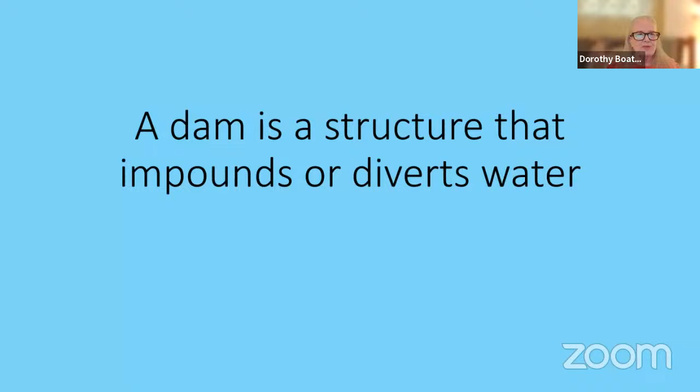First of all, we need to decide what is a dam, and the simplest definition I could find is that it is a structure that impounds or diverts water. So that includes a lot of different kinds of structures. I will be giving examples in the last third or so of my talk about removing 4 smaller dams on the Baraboo River, which is unique in that it has the longest undammed stretch in the United States at 120 miles. And then I will be giving some information about the removal of dams on the Klamath River, which are hydro dams, beginning this summer and ending next year, and will be the world's largest dam removal project.

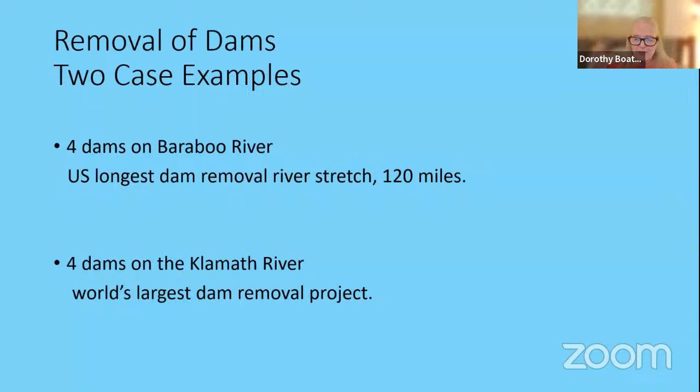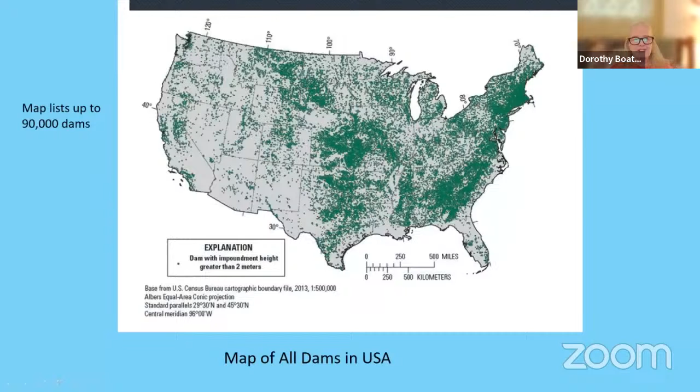So this is kind of astonishing. How many dams are there? Are there just a few? Apparently not — there are a lot of dams, as the next illustration will show. When you look at this map, you probably think all of the green is some sort of topographical feature. It is not. Each one is a little tiny green spot, as shown in the legend here. And there is an official list of up to 90,000 dams, so that's an awful lot of structures.

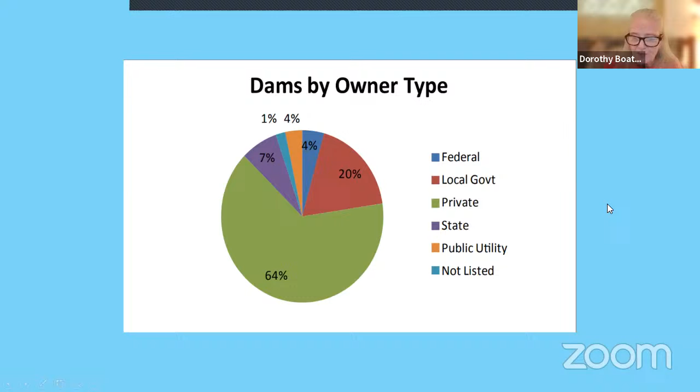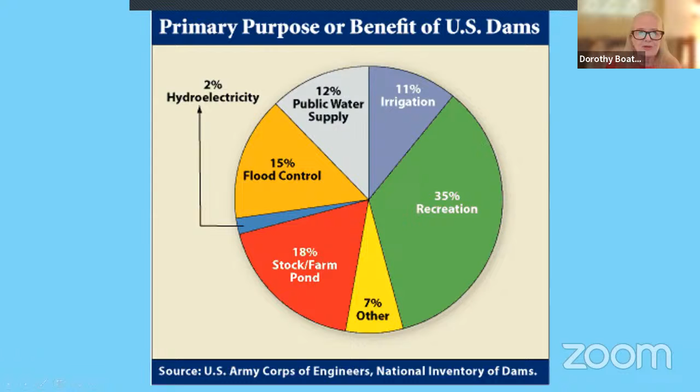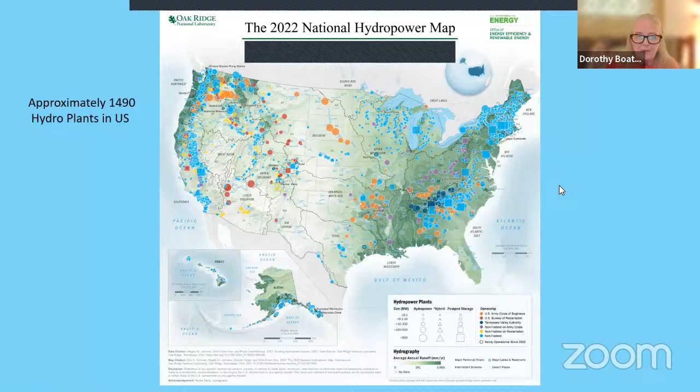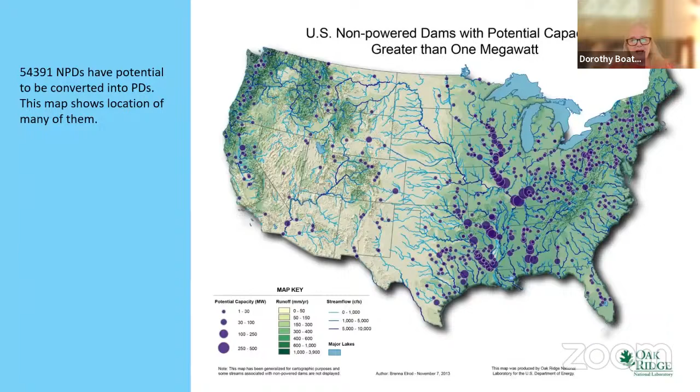A growing interest is in using or reusing non-powered dams and retrofitting them into potential power dams. This shows likely dams and their locations throughout the United States. So many dams could have the potential to become hydro dams if needed.

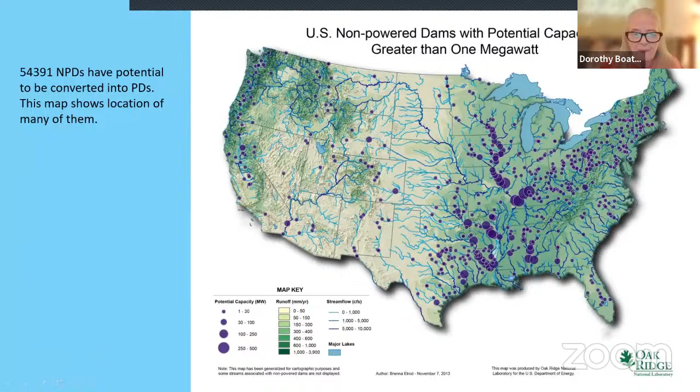Of the existing hydropower, who owns it? There are essentially 3 sectors: federal agencies, public ownership, and private ownership. The private ownership includes investor-owned utilities, independent power producers, and industrial companies, whereas the federal agencies are U.S. Army Corps of Engineers, very importantly, the Bureau of Reclamation, and the Tennessee Valley Authority, which is more prevalent on the East Coast. Whereas U.S. Army Corps of Engineers and Bureau of Reclamation factor very largely in the West.

Now, there is a dichotomy between the ownership of hydropower and the capacity or the output. Well, we find that the majority of the plants, as shown, if I can get my mouse to work, over here, the majority are in private ownership, whereas they have limited capacity. Federal agencies have only a smaller number of plants, but they are much higher energy producing, the majority of the energy.

And for our group, we need to think of hydropower as coming in 3 different varieties: impoundment structures, diversion structures, and pumped storage. These hydro plants throughout the United States range in size from small systems that are suitable for a single home or village to large projects that produce electricity for utilities. Again, on the numbers, of all of the 90,000 large dams, fewer than 2,300 produce power. So those are important pieces of information.

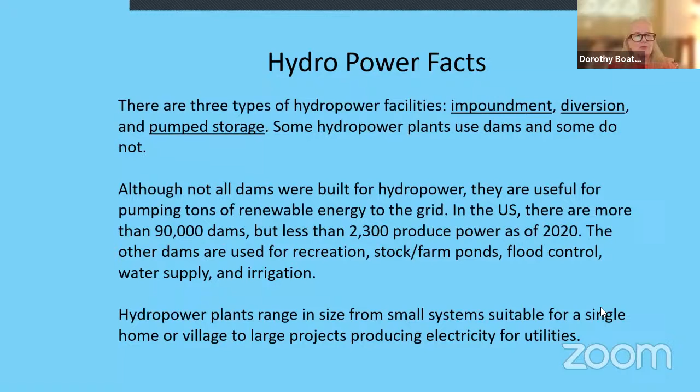Now, the impoundment hydro looks very much like what we expect a dam to look. We have the dam structure itself. We have a reservoir behind the dam. We have a spillway to release part of the water in a controlled fashion. In more modern dams, we have fish ladders to help promote the return of fish upstream. And then finally, we have the power generating component with the turbines and generators.

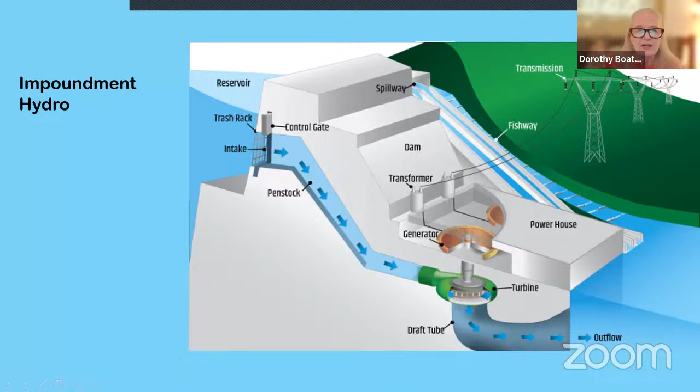An important part of hydro is diversion hydro, and I had no idea, but Niagara Falls electricity is this kind of hydro, in that a sluiceway or channel is devised to remove part of the water so that it can then move through another channel downstream through the penstock into the powerhouse where the turbine and generators are located, and then the remaining water spills back into the riverway. Some of these diversion hydros don't actually require what we would consider a dam.

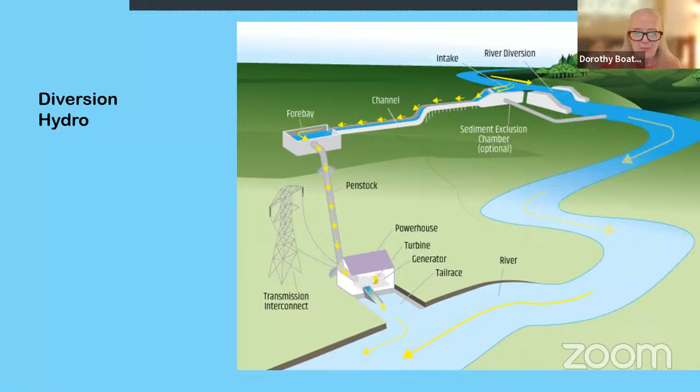And then a last type of hydro is not a dam structure at all, but involves pumped hydro, where we're using the potential energy of water to create the energy. So during the daylight, when the sun is shining here on solar panels, that energy is being used to pump water upstream or uphill into a reservoir. So that's what the power is doing. But at night, when the sun doesn't shine on the solar panels, the water that has been raised uphill is now released, goes down a channel to the turbines and generators, and generates electricity during the night.

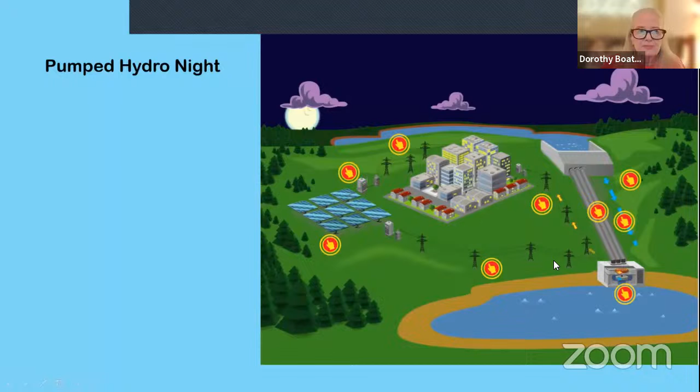Now back to dams, just in general, not necessarily dealing with hydro. There are basically 4 structural types of dams. The most common dam, of which 80% are, are called embankment dams. They're constructed from compacted soil, which is earthfill, or rock, which is rockfill, and have an impervious core. They're designed to transfer the entire water load downward. They are used to retain water across wide river valleys or for flood control, and typically they are shorter and wider than other types of dams.

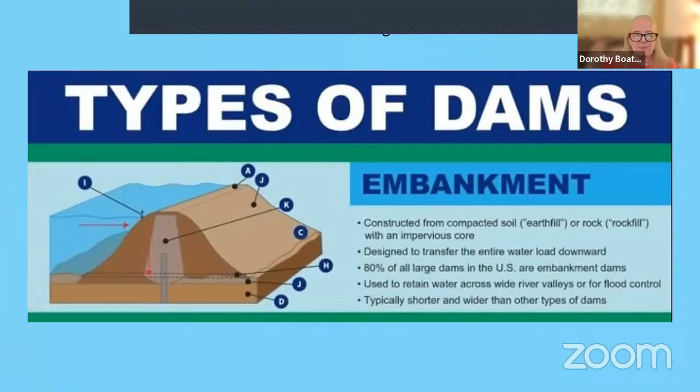Another type of dam that is particularly important in canyons is an arch dam. It's constructed of concrete, and it is designed to transfer the water load to adjacent rock formations. It is constructed only in canyons that have a solid rock wall that is able to resist the pressures of the dam. Because the canyon walls bear the majority of the load, the arch dams are thinly constructed and require less material than other types of dams.

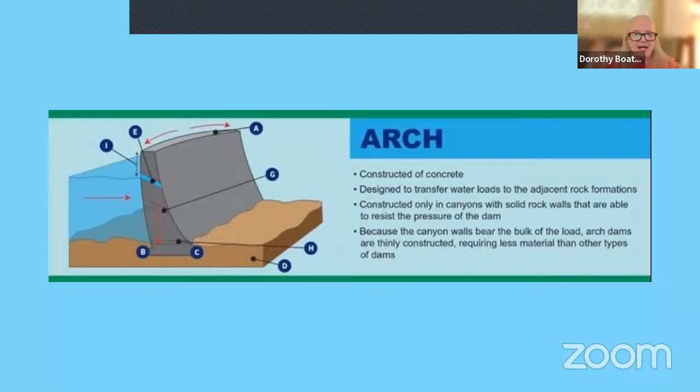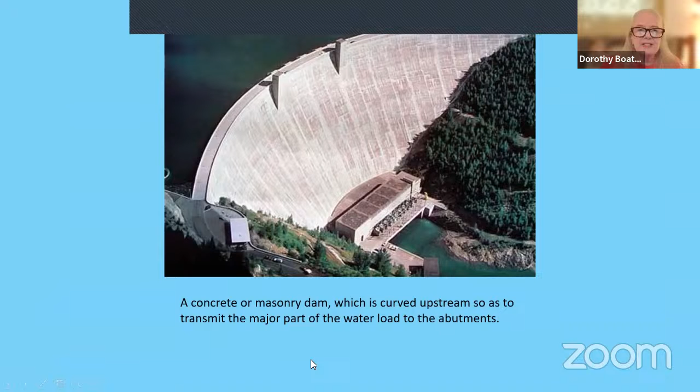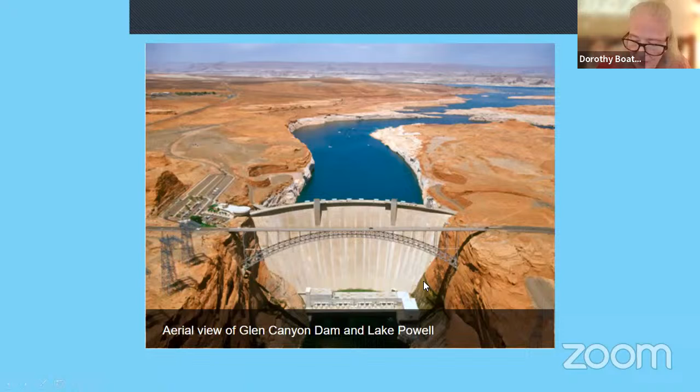Another type of dam, which is not as common, is a buttress dam, which is constructed of reinforced concrete. It bears the water load downward and to the buttresses. They have a hollow gravity dam with a solid upstream face and a buttressed downstream face. The buttresses are supports that transmit the water force to a bedrock foundation.

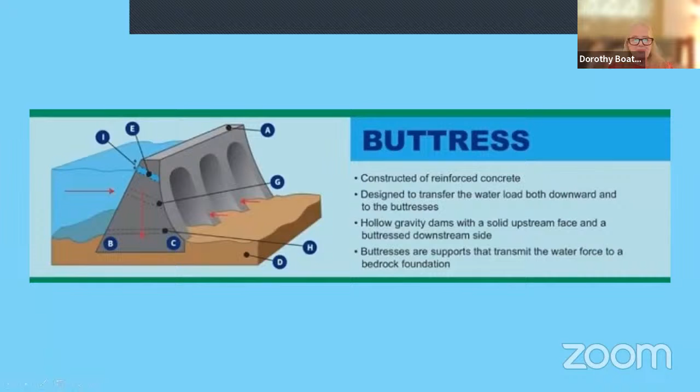And here is a dam in Canada, which very clearly shows this buttressing. And we can see the downstream side is maintained by a series of buttresses. These dams have various types and names, which include flat slab, massive head buttress, Ambursen dam, and multiple arch dam.

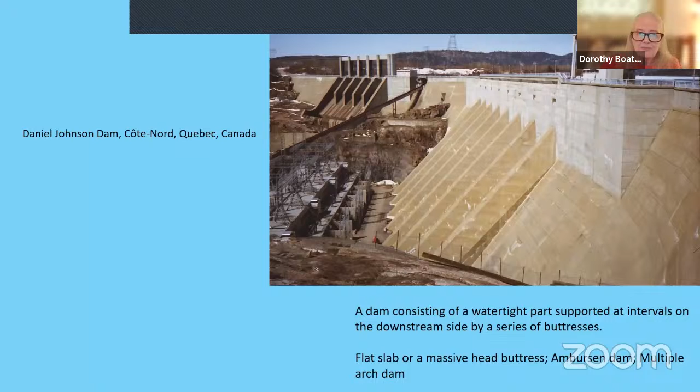And then our last category of dam is a gravity dam. It is constructed of concrete or stone masonry. It transfers the water load downward. It is typically found across narrow river valleys that have bedrock abutments and foundations. It retains water by utilizing the weight of the dam to resist the horizontal water load pushing against it. Each section of the dam is independently stable.

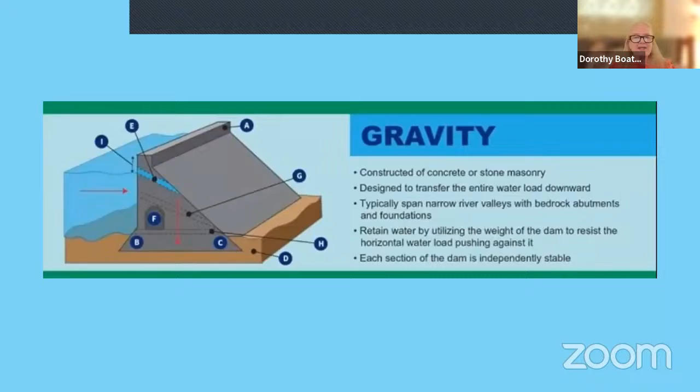And this is a pictorial representation of a well-known gravity dam, just to show what they might look like. Other names for this type of dam include hollow gravity dam, crib dam, roller compacted concrete dam. So those are our structural types.

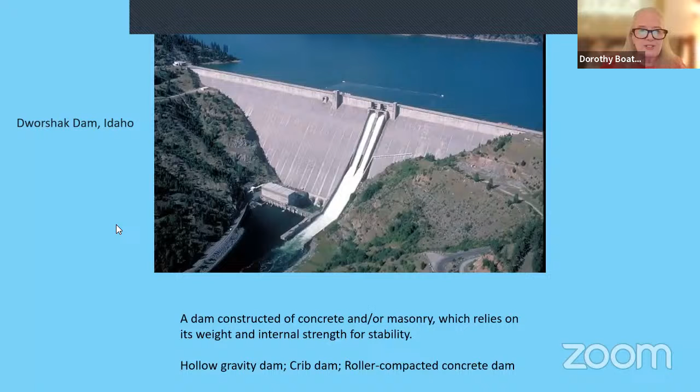And in terms of the frequency with which they're found, we again find that the earth or embankment type shown in the bottom bar are definitely the most predominant type, with the arch dams and the buttress dams being much less frequent.

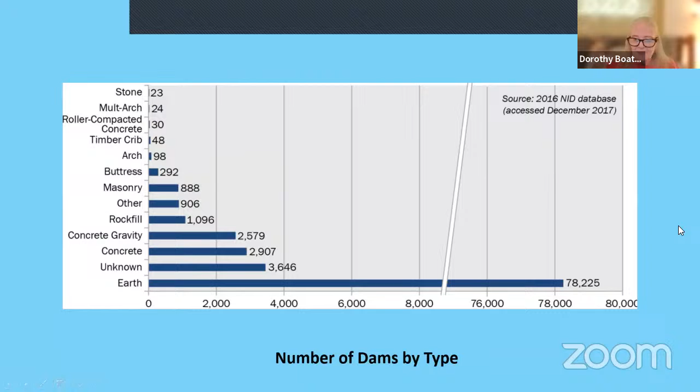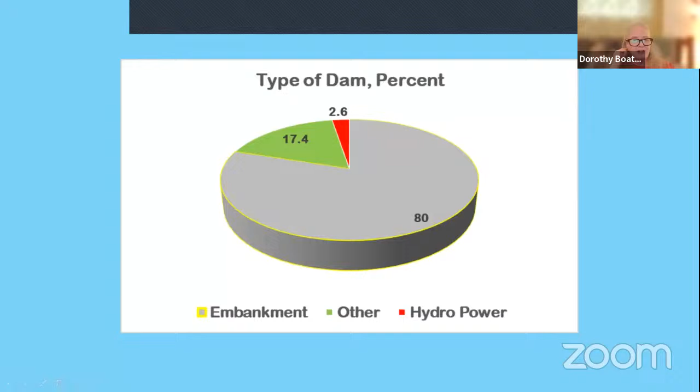And again, because we're interested in hydropower, this is just to illustrate the distribution of dams. Whereas 80% of the dams are embankment, only about 3% of dams are hydro dams. And I'm afraid that I've created a slightly misleading figure because some of the hydro dams in the 2 to 3% are actually embankment dams. But here you get at least a picture of what's going on.

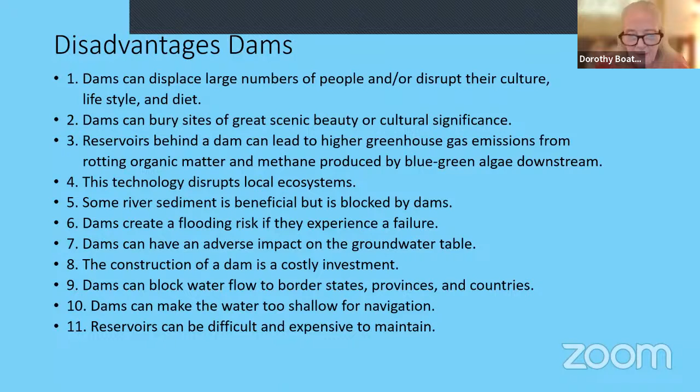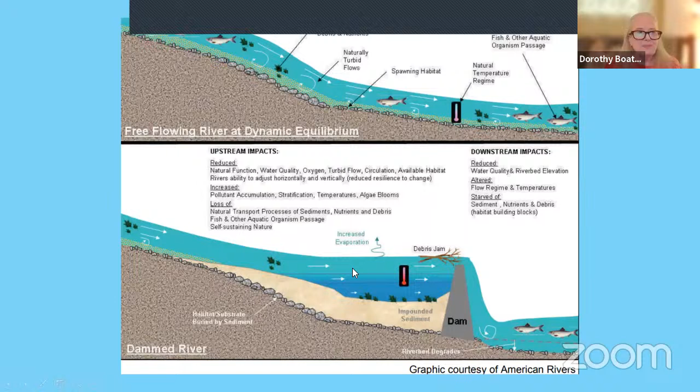We lose the natural transport processes of sediments, nutrients, and debris. Fish and other aquatic organism passage is also lost, as is the self-sustaining nature of the ecosystem. There are 4 ways that dams damage rivers. They block rivers, they slow rivers, they alter the habitat, and they impact the water quality.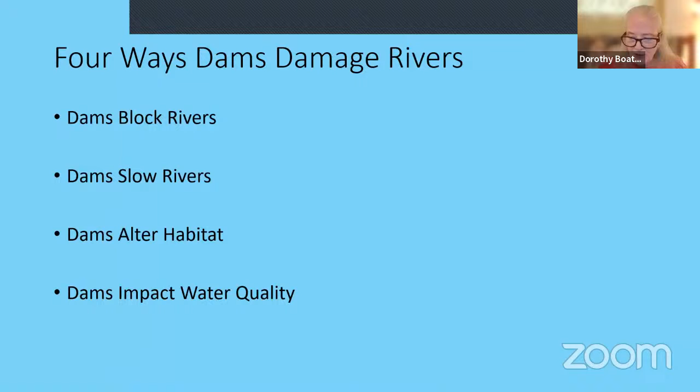The dams prevent fish migration. This also limits their access to spawning habitat, their food resources, and to safety niches that prevent predation. The dams are often a particular difficulty because they have been sited in the rapids parts of rivers, which are the most important for fish resources.

And we think that putting in fish passage structures will solve this problem, but it really only allows some fish to pass around the dam. And depending on the rivers and the number of dams the fish have to cross, that can affect their effectiveness. So they're not a panacea.

The rivers are slowed by the dams as well. Most aquatic organisms, including the important salmon and river herring, depend on the steady flow to guide them. The stagnant reservoir pools disorient the migrating fish and can significantly increase the duration of their migration.

Very importantly, dams also alter the timing of flows. Some hydropower dams withhold and then release water to generate power for peak demand periods. So these can be quite abrupt cycles, even though the average flow may be maintained. The huge spikes of withholding and then rapidly releasing have tremendous effects on the ecosystem.

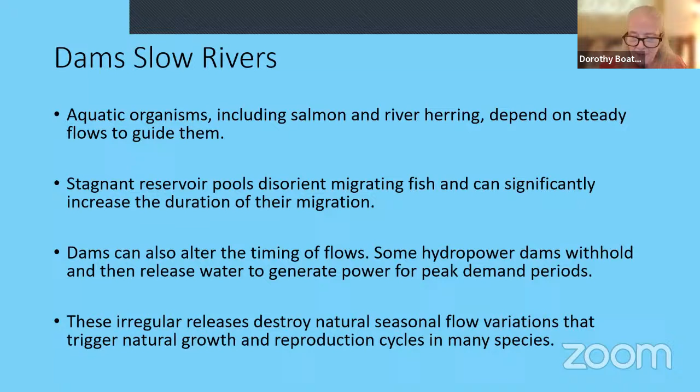The dams alter the habitat as well. They can trap sediment and bury the rock beds where the fish spawn. Important components of the habitat, which are logs, gravel, and food, can become trapped behind the dam, and then they are not able to maintain complex habitats such as riffles and pools downstream.

Additionally, dams that divert the water for power and other uses often remove water needed for healthy in-stream ecosystems. These peaking power operations can cause dramatic changes in reservoir water levels. This can result in stretches below dams that are completely dewatered.

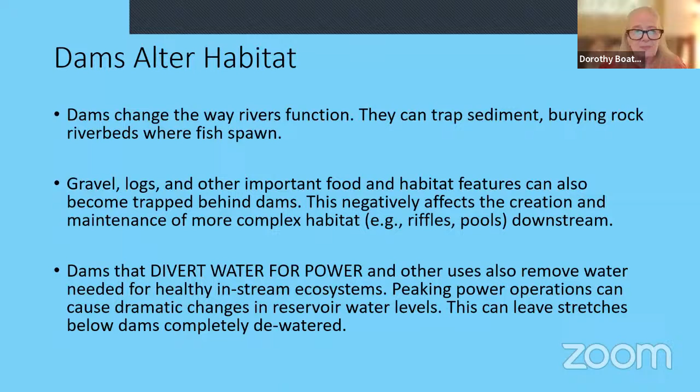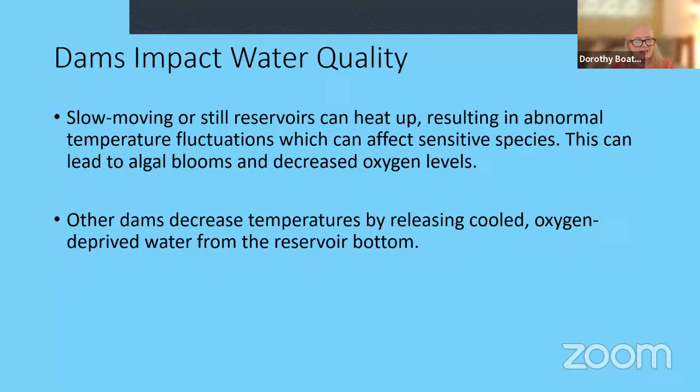The dams impact the water quality. There are two things that can happen. Usually, the slow-moving or still reservoirs heat up, which results in abnormal temperature fluctuations that affect species. This can lead to algal blooms and decreased oxygen levels. Other dams decrease the temperature because they release cooled, oxygen-deprived water from the reservoir bottoms.

So this comes from a handbook from the various river alliances about how to go about removing a dam. And they said, think small. Although there are up to 90,000 dams, as we have seen on some of the pictorials, that are large enough to be listed in databases, there are additional dams that are not shown.

Estimates are that there are 2 million small dams that are lower than 25 feet in height. A lot of these are in the Midwest and East Coast, and the majority of US dams, especially in the Midwest and East Coast, are small.

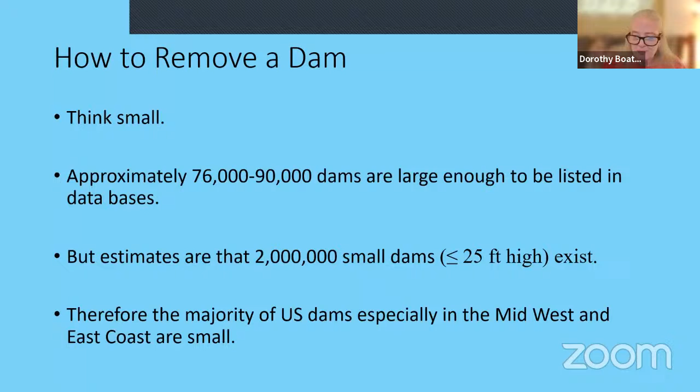There are various reasons to remove these small dams. Number one, they're old. Most dams are over 100 years, but the life expectancy for an average dam is 50 years. So many of these dams

are up for decisions about whether to repair them or to remove them. Most are not used for their original purpose, so the economic factors which would have made it easy to repair them and cover the costs are no longer there. Also, by being smaller, it is easier to estimate what things will cost and what the economic and environmental benefits will be of removal versus repair. And very importantly, a fourth reason is that by being smaller in scale, fewer people are involved to deal with,

fewer stakeholders to get on board, to convince and give approval. This is often the step that takes the longest time in any dam removal. Once the owner is convinced, convincing the communities and stakeholders that dams need to be removed is often a difficult process.

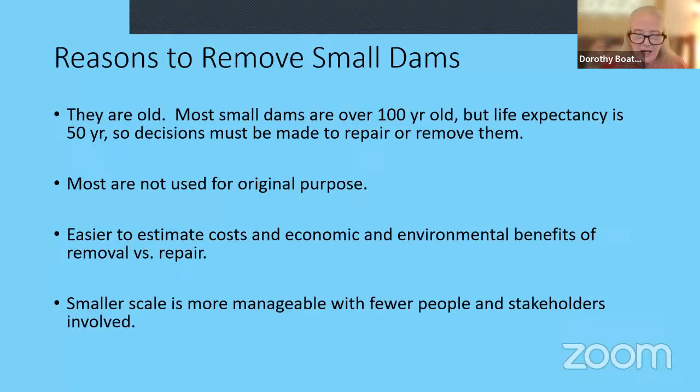These organizations also say there are 4 major categories of concern in dam removal. First is environmental. Ask questions: how would the river benefit from the dam removal? Would the plants, animals, and fish benefit from removal? And very importantly, would unwanted species be able to move up or down the river after dam removal? Think about zebra mussels in this category.

Again, would water quality benefit from dam removal? We think that would automatically be yes, but apparently that could change. Very importantly for the stakeholders is economic. Would dam removal reduce the local revenues from recreation or other uses?

Just think about what happened when Lake Delton very rapidly had its dam breached and was lost. It threatened a $3 billion industry based around the dam, and it was very quickly restored and rebuilt. But with other dams, we have to consider what would happen to lost revenues.

And then one has to decide what is the best economic decision, both short and long term. Who would benefit from the restored lands? Would the owners benefit at all? Would it just be the users? How would property values be affected? These are all very important things before a dam removal would be approved.

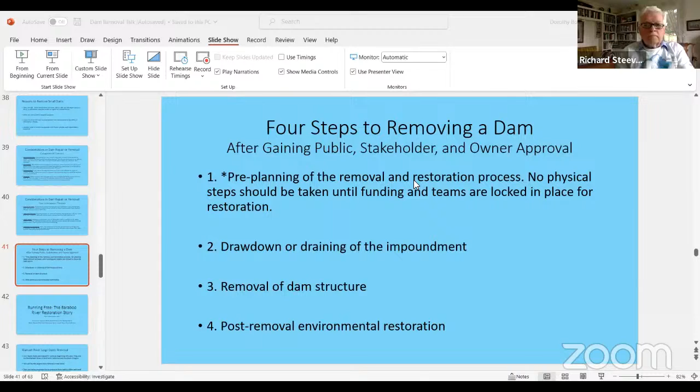The most important process they identified is the key aspect of pre-planning the removal and restoration process. They believe no steps should be taken for removal until the funding and teams are locked in place for restoration. Then, once you've decided to remove the dam, you have to remove the water, remove the structure, and then have remediation.

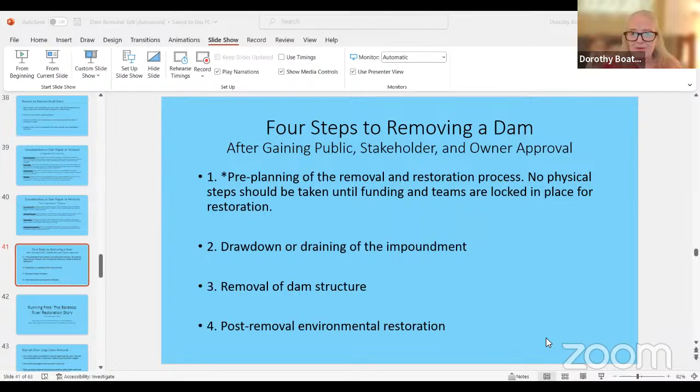The next thing I'm going to present is Running Free, the Baraboo River restoration story, which focuses on the removal of the 4 final dams in the Baraboo area. I believe this occurred around the year 2001, and included the Waterworks City Dam, the Oak Street Dam, the LaValle Dam, and the Linen Mill Dam.

At this point, I am going to shift to a different presentation, and I'm going to show you the film, which is about 15 minutes in length.

It is slowly loading, and I'm not quite sure why it's so slow.

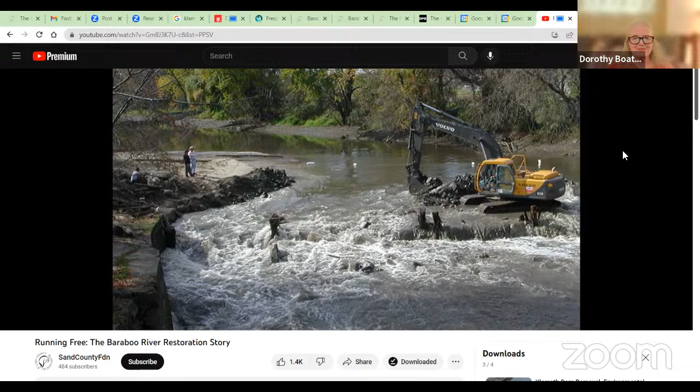The money to pay for the removal of the dams was a fraction overall of what it would have cost to keep them up. Where did the money come from? In part from the owner. Certainly the city of Baraboo put some of its money in.

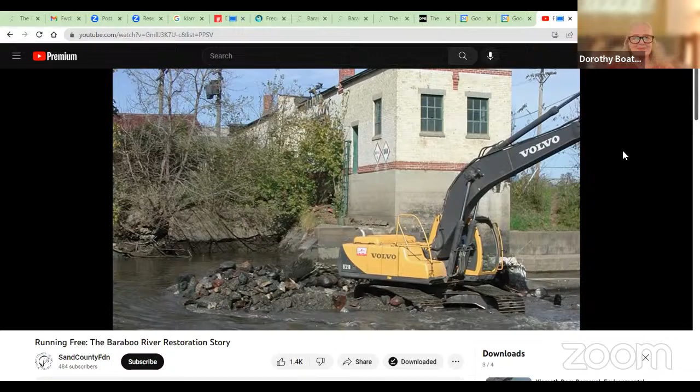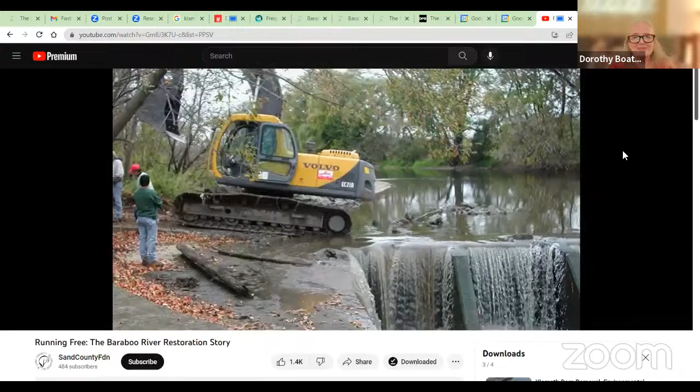The Wisconsin Department of Natural Resources and the U.S. Fish and Wildlife Service had matching funds available in some cases. The National Fish and Wildlife Foundation played an enormous role in funding the removal of these dams and the proper rehabilitation of the dam locations.

Water quality improvement often follows dam removal, not necessarily immediately, but generally within one to three months, which is pretty quick. When dams are removed, one of the most noticeable environmental improvements is the fish return, with the fish community diversifying to what it had been prior to the dams. Secondly, different parts of the habitat become available to support not just fish, but a wide range of other biota. The dams had basically displaced habitats because they're typically constructed where there's fast current for energy production.

And those tend to be some of the best habitats in a river system. There were 10 species of fish that lived only downstream of the Linen Mill Dam. Once the dams were removed, they quickly moved upstream, and so you've got a more diverse fishery and a more stable ecosystem, which results in a more sustainable fishery in general.

The types of habitat that was affected by the dam should have been colonized by a different type of fish, and now we're seeing those fish, such as very environmentally sensitive darters, which are in the perch family, a lot of minnow species, walleyes and bass, and hopefully we're going to see sturgeon migrate up through this river as well.

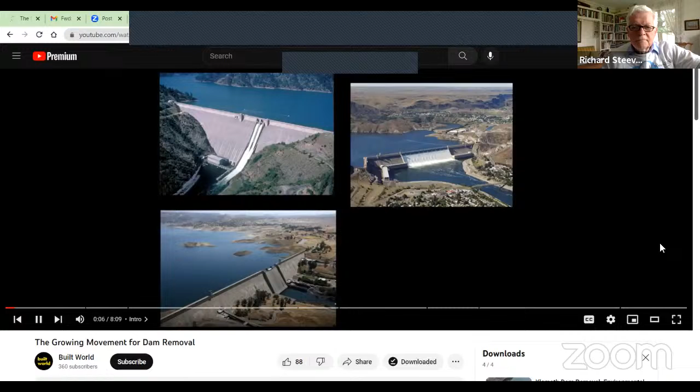Impressive structures ever built by humans are dams. Typically concrete or earthen structures, dams block entire river channels, controlling the flow of water in order to generate electricity, aid irrigation for farming, control flooding, and assist with ship navigation.

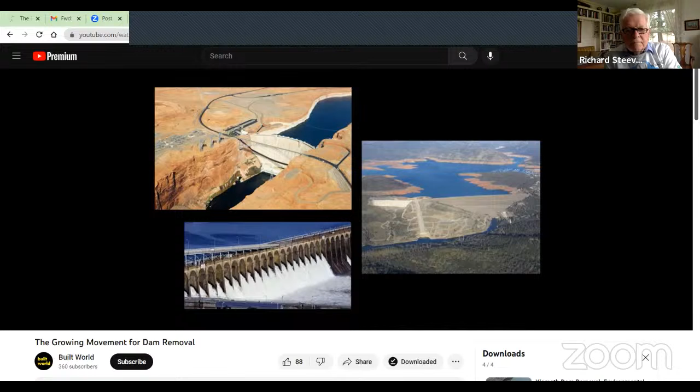In the United States, dams have dramatically altered the landscape, turning entire river systems into mechanized systems of controlled lakes. And in the process, the dams have turned deserts into productive farmland and provided clean, cheap electricity for a growing population. But in recent decades, concerns about the profound negative effects of dams have grown.

And a movement calling for their removal is getting ever louder. This is Built World, a channel about architecture, urban design, and infrastructure. And today, we're talking about dams and the increasing calls for their removal.

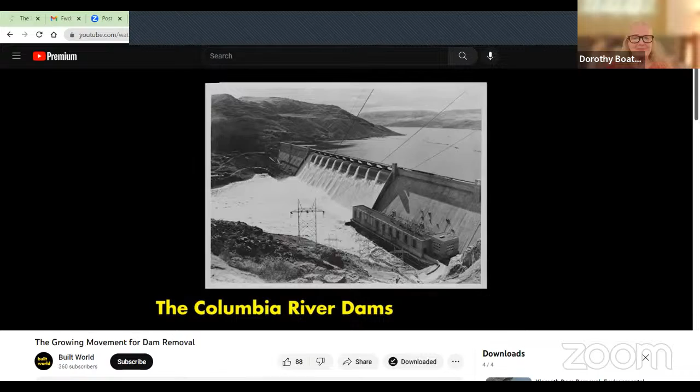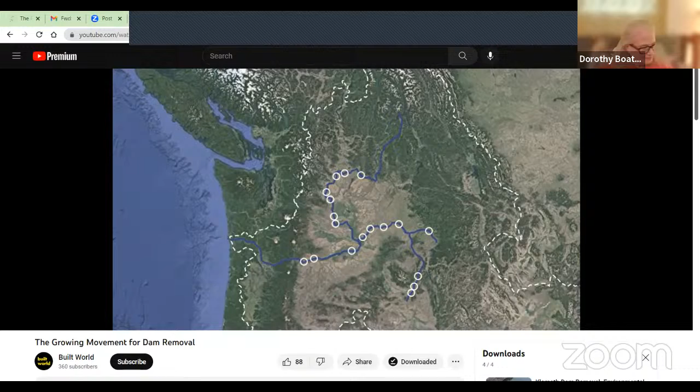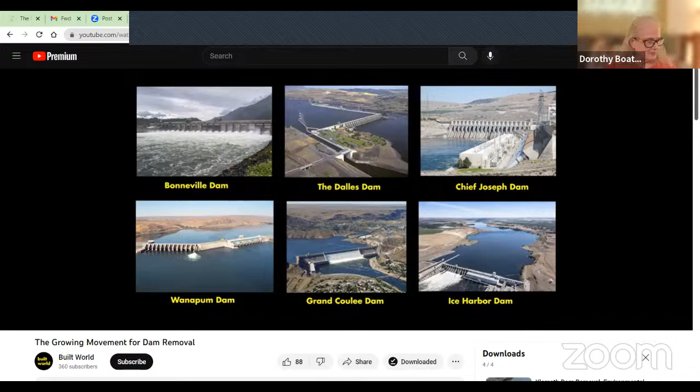The Columbia and Snake River watershed in the Pacific Northwest provides a useful case study on both the benefits and environmental impacts of dams. There are 18 major dams on this river system. Together, the dams on the Columbia and Snake Rivers have transformed the Pacific Northwest with the electricity, irrigation, and flood control they provide. But at the same time, these dams have been devastating to the region's environment, and particularly for one of its most critical components, salmon.

Salmon have historically migrated from the Pacific Ocean into watersheds all over the Northwest, via the Columbia, Snake, and thousands of smaller rivers. Scientists often refer to rivers as the circulatory system of the landscape, moving sediments downriver and nutrients upriver. And much of this nutrient flow depends on the migration of salmon, but the construction of dams disrupted this natural flow.

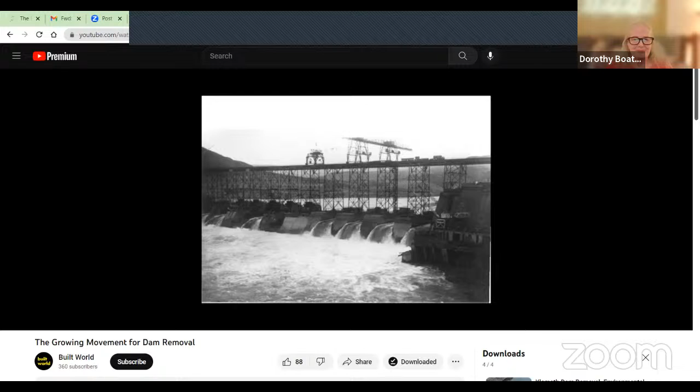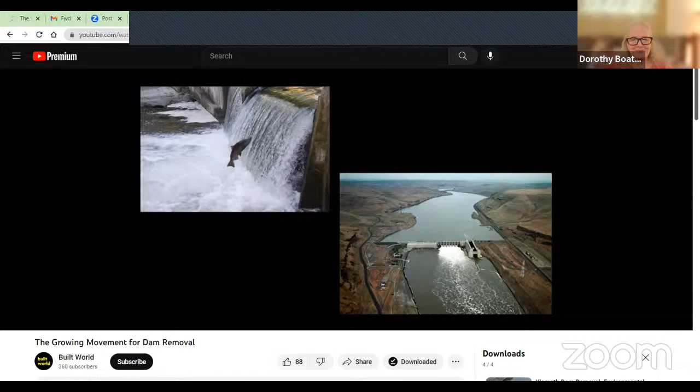Before white settlement, it's estimated 10 to 16 million salmon returned to the Columbia River annually to spawn. Today, that number is estimated to be around 1 million, and a major cause of this reduction is dams. The dams block the fish in their tracks, turning a once free-flowing river system into a tightly controlled and engineered machine.

Environmental regulations now require dam operators to mitigate their negative effects on fish. This comes in the form of fish ladders, or building things like fish hatcheries, and even loading young salmon into trucks to bypass the dams. But these measures are expensive and produce little tangible results for the cost. Increasingly, however, calls to remove dams and return rivers to their natural state are growing.

In the past 2 decades, hundreds of dams have been removed in the United States. And many of these projects have been driven by economics as well as environmental reasons. Primarily, removal projects have been focused around small, aging dams, where the potential liability of failure or the cost to maintain or upgrade obsolete technology outweigh the profits that can be made from their electricity.

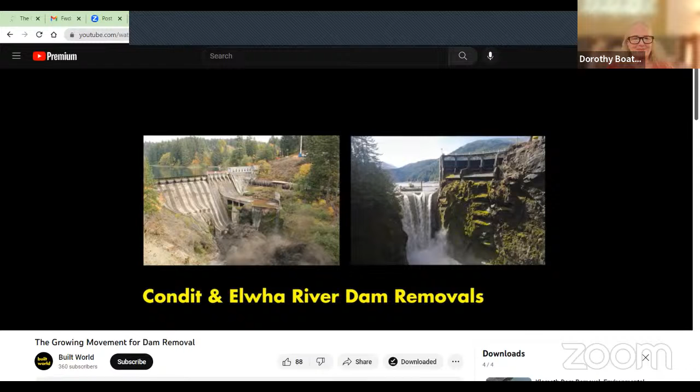But 2 recent projects have changed the conversation around dam removal. Both the Condit and Elwha River dam removals in the early 2010s were the largest and most ambitious ever attempted in the US. In the case of the Condit Dam, environmental regulations required the dam's owner to install a fish ladder in order to renew the dam's operating license.

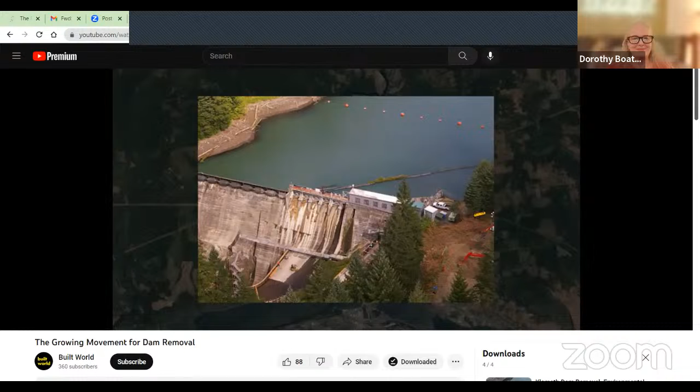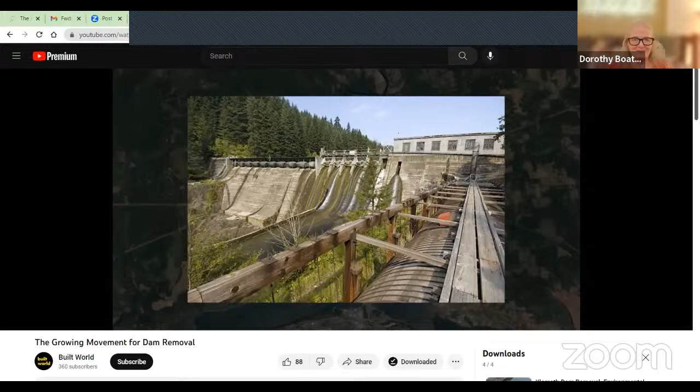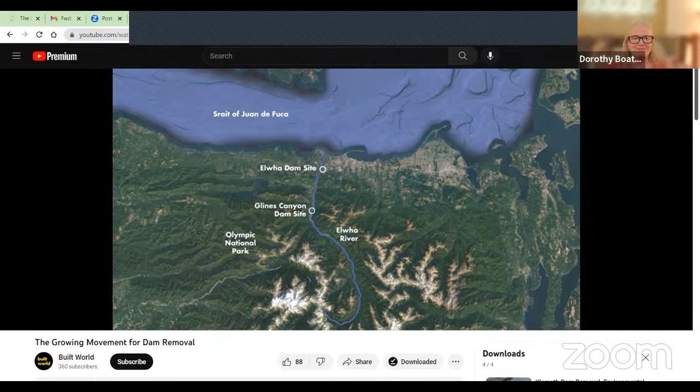But it was shown that the costs of this upgrade were greater than the revenues the company could generate on the dam's electricity. It was decided that the dam would be intentionally breached, allowing the White Salmon River to flow once again unimpeded. Shortly thereafter, the removal of the Elwha and Glines Canyon dams surpassed Condit in both complexity and scale.

Nearby tribes like the Elwha Klallam had long pushed for the removal of the 2 dams on the Elwha River in Washington's Olympic Peninsula, in order to restore salmon runs in a landscape they've inhabited for thousands of years. With the backing of environmental groups like the Sierra Club, the federal government approved the demolition of the dams in 1992.

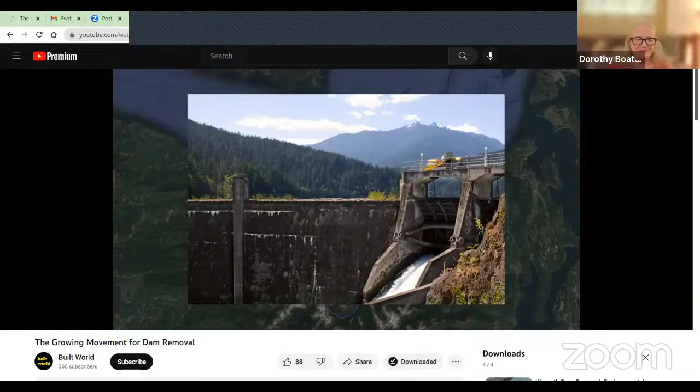But years of pushback and then years of planning delayed the project's start until 2011. The dams were slowly demolished over a 2-year period, a technique known as notch and release, so as not to release all the sediment that had built up behind the dams in a single explosive event.

Simultaneously, restoration efforts backed by the National Park Service have been ongoing to restore the dam sites and rewild the Elwha into something resembling its pre-dam state. Proponents of dam removal continue to think bigger. A project on the Klamath River in Oregon and California has recently won full approval to move forward.

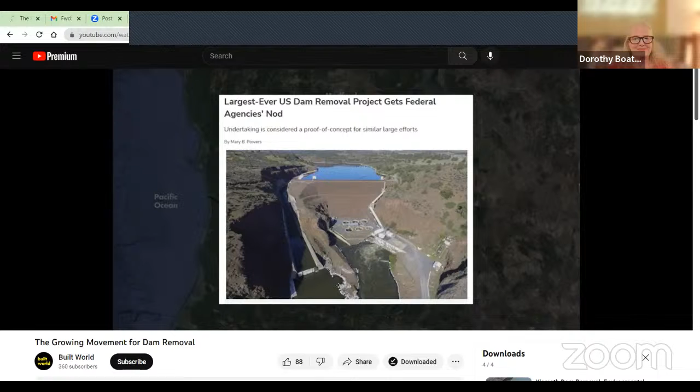The $500 million project will involve the removal of the J.C. Boyle, Copco 1, Copco 2, and Iron Gate dams on the river. Expected to begin in 2024, it would surpass Elwha as the largest ever attempted in the U.S. These 3 projects have pushed the envelope for the scope and complexity of dam removal, and have made massive strides toward re-establishing the ecological richness of the region. But still, the juggernaut dams on the Columbia and Snake River remain.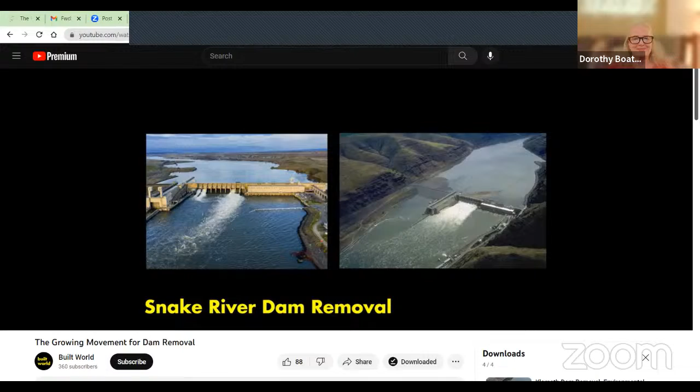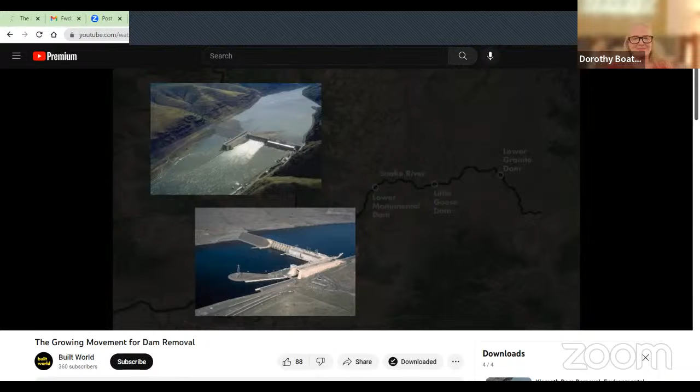For years, numerous proposals have been floated to remove 4 major dams on the Snake River. The Lower Granite, Little Goose, Lower Monumental, and Ice Harbor dams have been identified as candidates for removal because of their high costs to maintain, relatively low power output, and impacts on salmon. Yet opposition is fierce from farmers and utility customers who benefit from the dams. In 2020, a $33 billion package was proposed that would include removing these 4 dams by dismantling the earthen berms that are adjacent to the concrete dam structures.

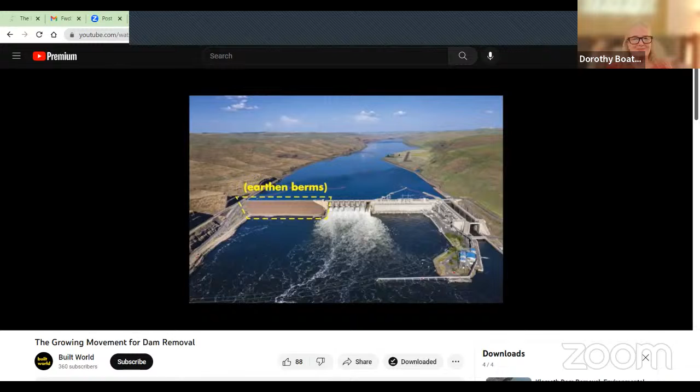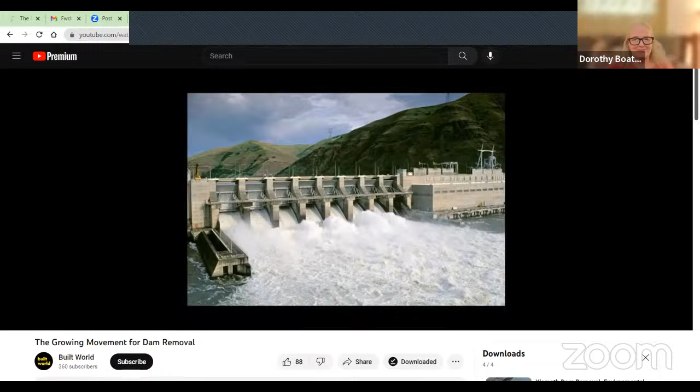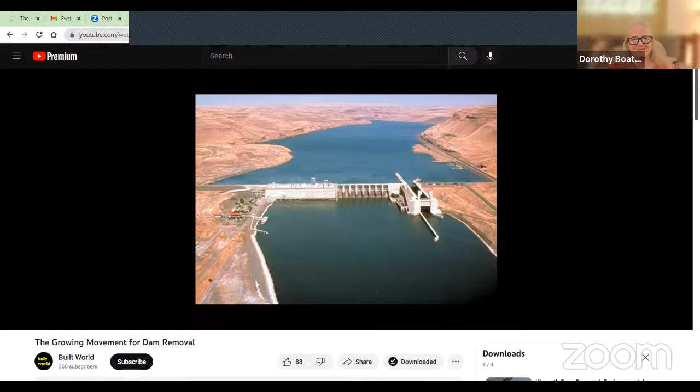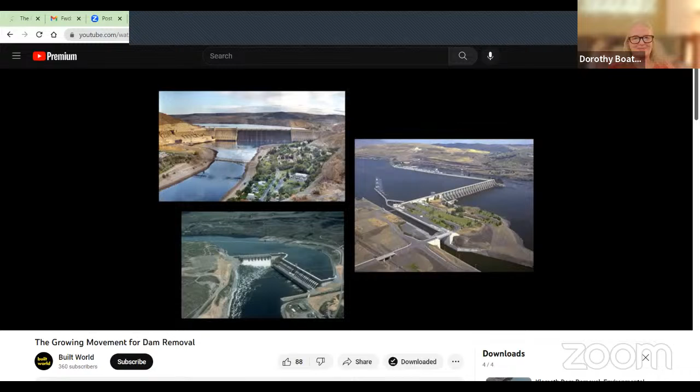But the package would also establish an agency consisting of state and tribal leaders to manage salmon, as well as set aside funds for infrastructure that can replace the electrical generation, transportation, and irrigation benefits the dams provide. In late 2022, a federal report also recommended the project, but it still faces a long uphill battle. When it comes to dam removal, one important consideration is that dams are one of the largest sources of carbon-free electricity. So despite the environmental benefits that dam removal may bring, the electricity they provide still must be replaced, which is why to many, the concept of dam removal, especially for behemoth, major power-producing dams, is still almost unthinkable.

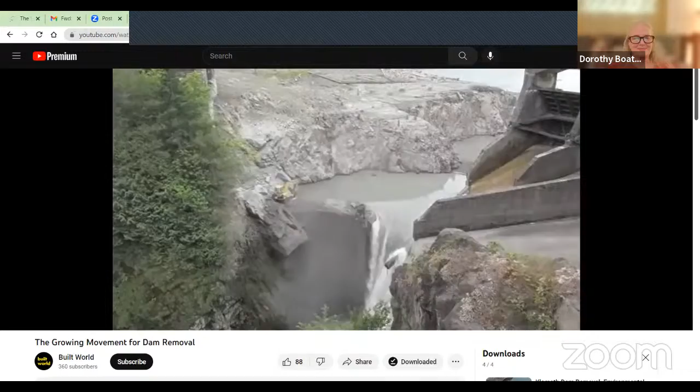But what's been proven with these smaller dam removal projects is that in cases where energy production is negligible, the benefits of their removal are clear. Like many 20th century projects that helped build the United States, dams have provided both widespread benefits and negative unintended consequences. But the growing slate of successful dam removal projects perhaps shows a new way forward, an opportunity to radically transform the landscape by deconstructing human interventions and allowing rivers, salmon, and the landscape around us all to be unimpeded once again.